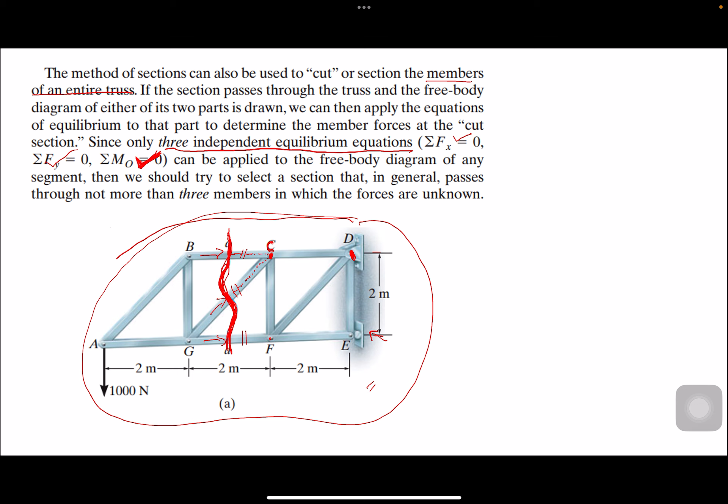Considering the entire truss, you take moments at a certain point, maybe point D or point E. So you decide which to analyze. Just use the entire truss to determine these support reactions. Once determined, you'll know Dy, Dx, and Ex. So there's no problem in using this right side of the truss.

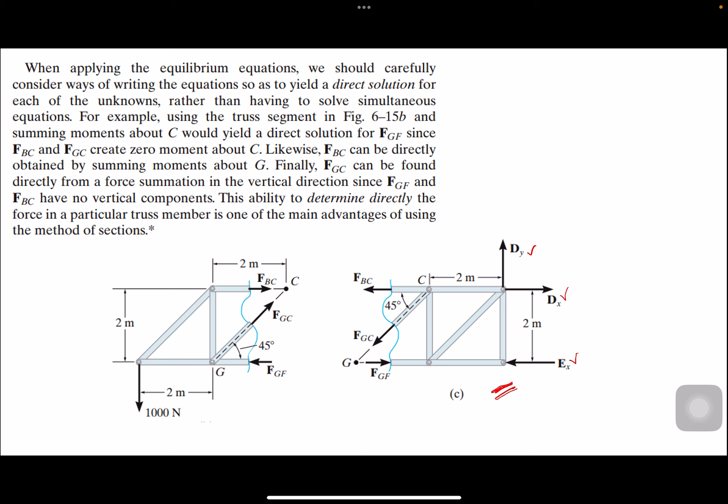As in the method of joints, there are two ways to determine the correct sense of an unknown member force. We will adopt this first method, where through inspection, you can write or draw the correct sense of an unknown member force if you can analyze it. But if you can't, because the case is complicated, you can assume the sense of the unknown member force and then verify it later from the numerical results.

So if the value we calculated is positive, for example in member FGC, it means our assumed sense in the FBD is correct. If what we got is negative, for example in FBC, it means we need to reverse what we assumed in the FBD. So it should actually go toward this pin.

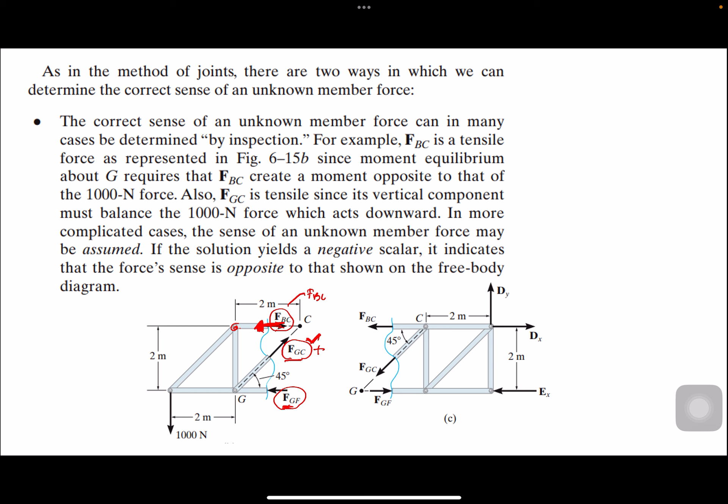So here is the procedure for analysis. Again, if what we're looking for are forces in just one, two, or three specific members of the truss, we can use the method of sections. And the first step is to draw its free body diagram.

We choose where to cut or section the truss through the members where forces are to be determined. Wherever you cut, the forces of those members become exposed. So usually, wherever you cut is where the forces you want to find are.

Then, before isolating the appropriate section, it may first be necessary to determine the truss support reactions. So if necessary, you compute the support reactions by considering the entire truss.

Then draw the FBD of that segment of the sectioned truss which has the least number of forces acting on it.

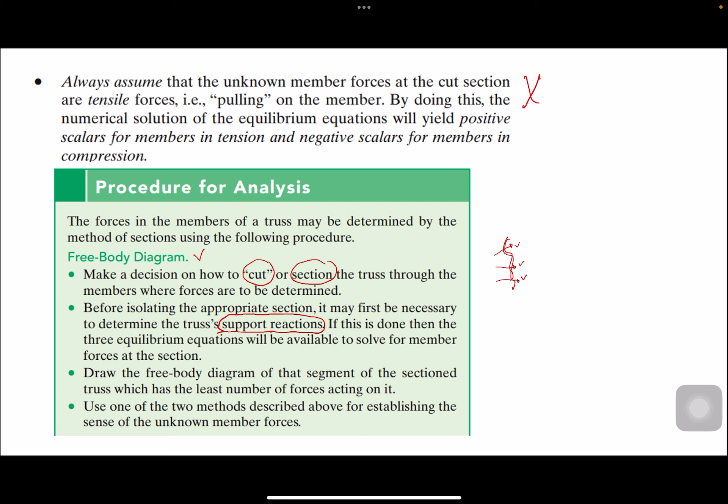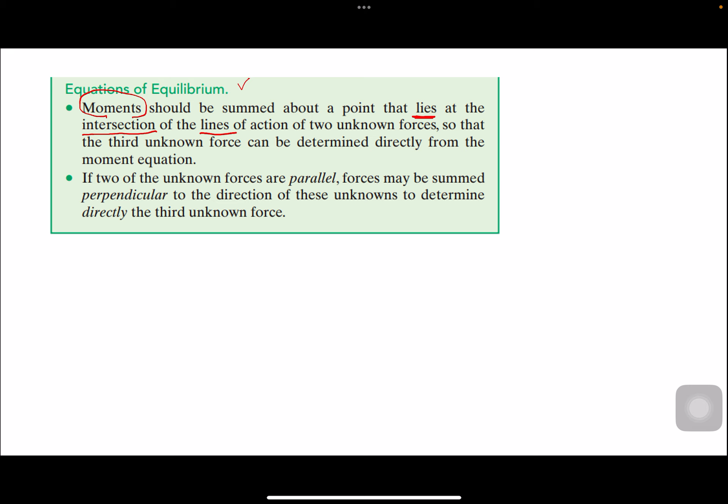Then use one of the two methods described above for establishing the sense of the unknown member forces. Then apply equations of equilibrium, and accordingly, choose the point where you take moments at the intersection of the lines of action of two unknown forces, such that the third unknown force can be determined directly from the moment equation, since the other two pass through the point you chose. So only one force remains in the moment equation, which is the unknown force, and you can get it right away.

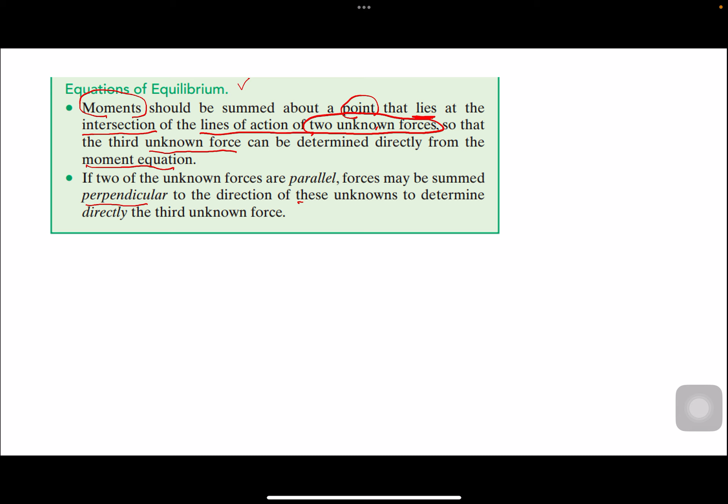If two of the unknown forces are parallel, forces may be summed perpendicular to the direction of these unknown forces to determine directly the third unknown force.

So for example, if these are the unknown forces, one to the right, one to the left, and there's one like this, these two forces are parallel. So if we want to find this force, say force GC, since these are parallel, we sum forces in the direction perpendicular to this parallel force, in this case along Y, so we can directly get the unknown, the third unknown force, which is FGC. Since this has no Y component, and this one also has none, we can get it directly. That's it.

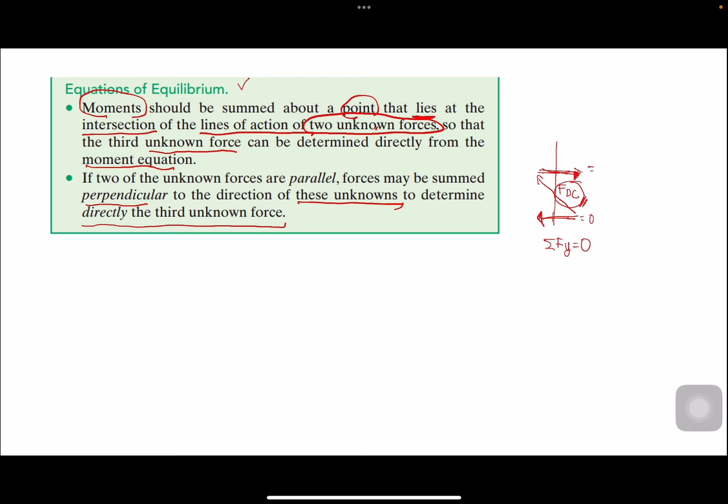So we have an example here. Determine the force in members GE, GC, and BC of the truss shown. Indicate whether the members are in tension or compression.

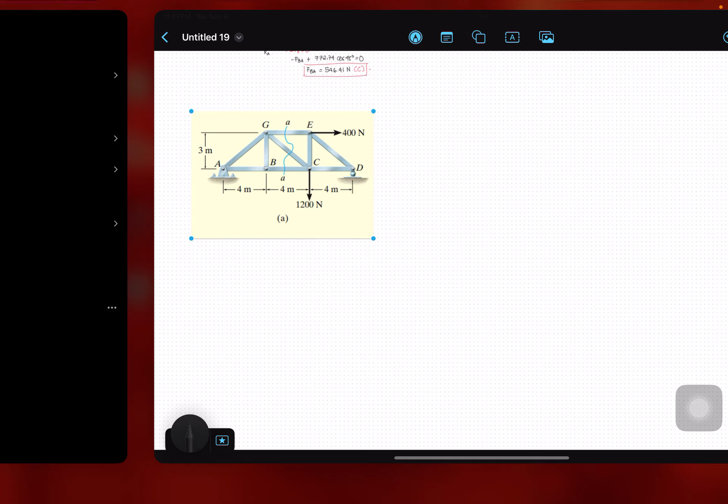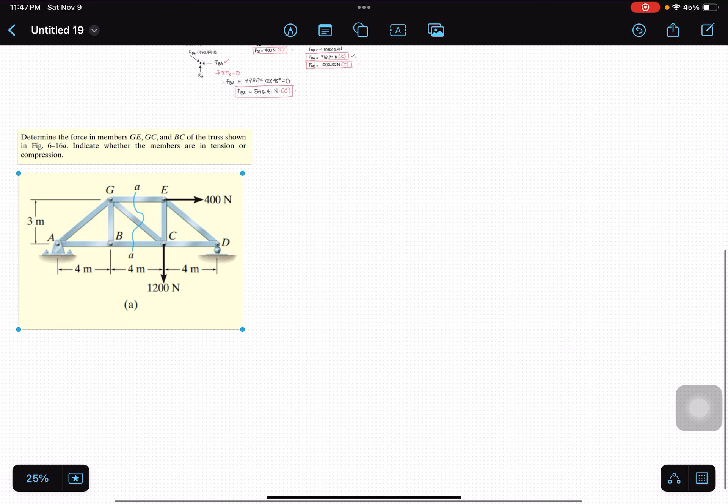Determine the force in members GE, GC, and BC of the truss shown. Indicate whether the members are in tension or compression. So that indication is always required — we need to know the nature of the force in the member, tension or compression. So we can see specifically what forces are being asked: members GE, GC, and BC.

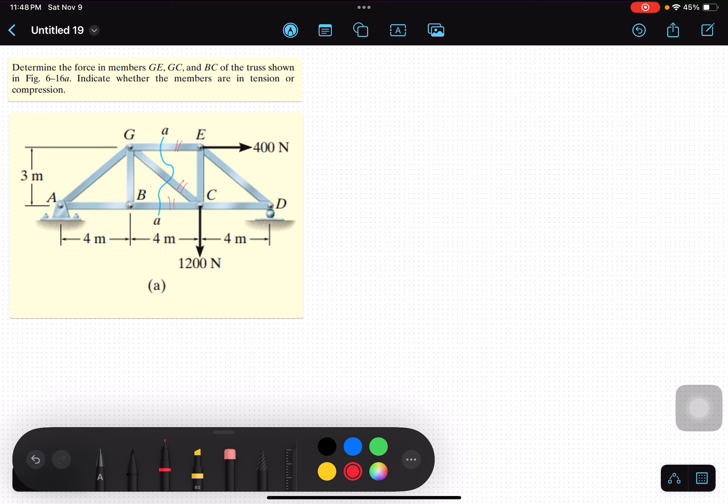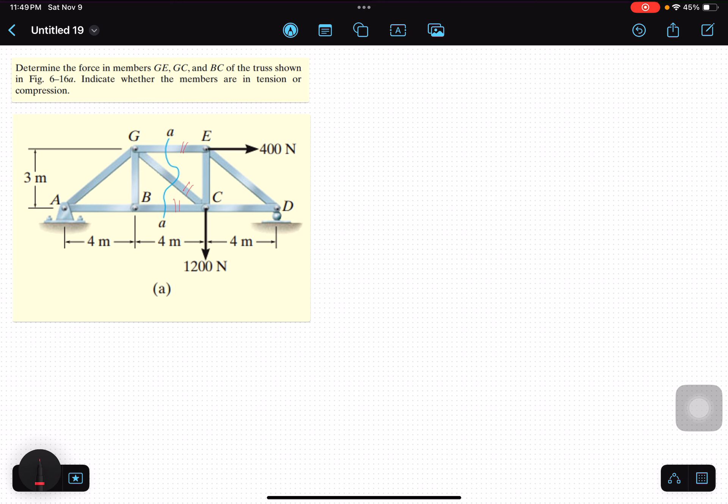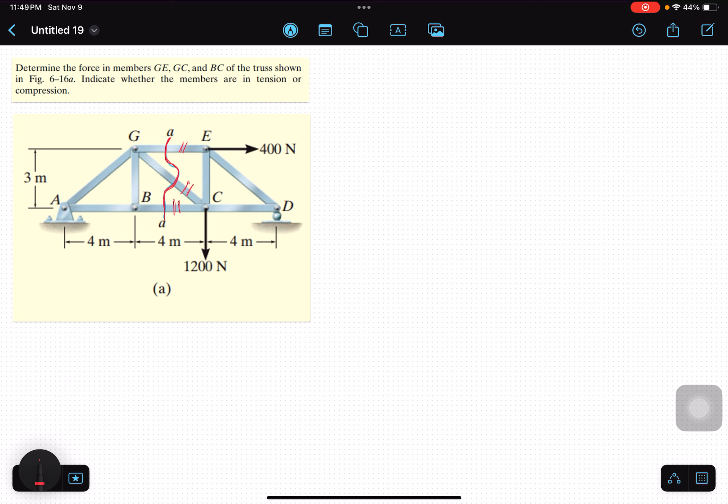So, first step, we need to make a cut. But before we cut, where do we cut? Of course, the section where we cut should expose the forces we want to get. Here, these are FGE, FGC, and FBC — three unknowns, three members. So if we cut at this blue section, what gets exposed are three unknown forces in the three members. That's okay, because as discussed earlier, the unknown forces when you cut should not be more than 3. In this case, it's exactly 3, so it's fine.

Now, before we cut, let's look at the left side and right side — both have support reactions. So maybe it's necessary to compute the support reactions first. Which side do you want to consider? If left, we need the reaction at A. If right, we need the reaction at the roller. Let's say we consider the left side of the section. So therefore we need these support reactions: AY and AX, since it's a pin, and in 2D there are only two, AY and AX.

And for AX, since there's only one force along the horizontal, 400 Newton, that is what's countered by the X component of the support reaction at A. If this is to the right, it means the reaction is to the left, same magnitude, 400 Newton.

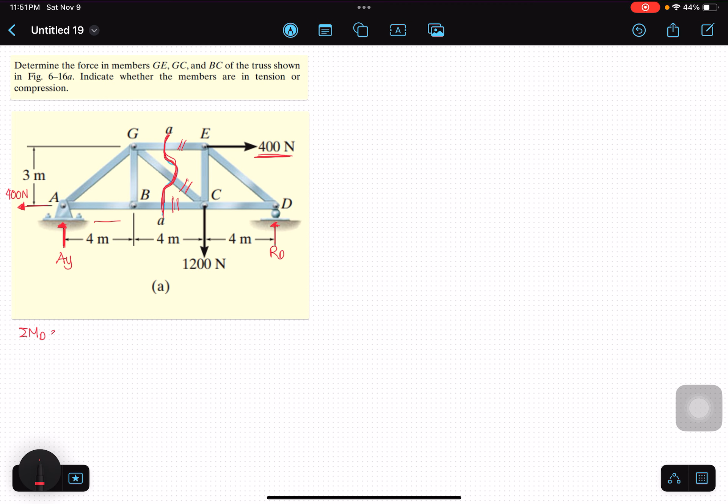So what's left is the reaction in Y, AY. How do we find AY? We do a summation — since there's a roller too, let's sum moments at point D equal to zero.

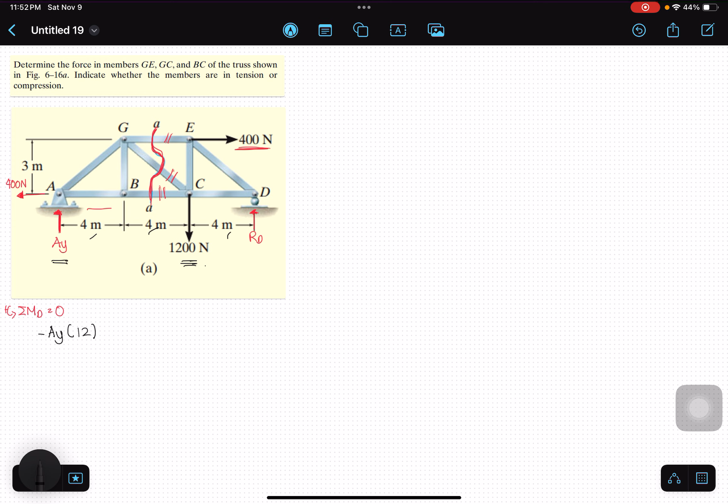Taking counterclockwise as positive: at point D, AY creates a moment. AY's moment is clockwise, so negative AY times moment arm of 4 plus 4 plus 4, giving 12. Then the 1,200 Newton force also creates a moment, counterclockwise, so positive 1,200 times moment arm of 4. Then the 400 Newton force also creates a moment, clockwise, so minus 400 times moment arm of 3 meters. All equals zero.

So the answer here will be AY equals 300 Newton. You can check using your calculator — yes, it's 300 Newton. So we've obtained that.

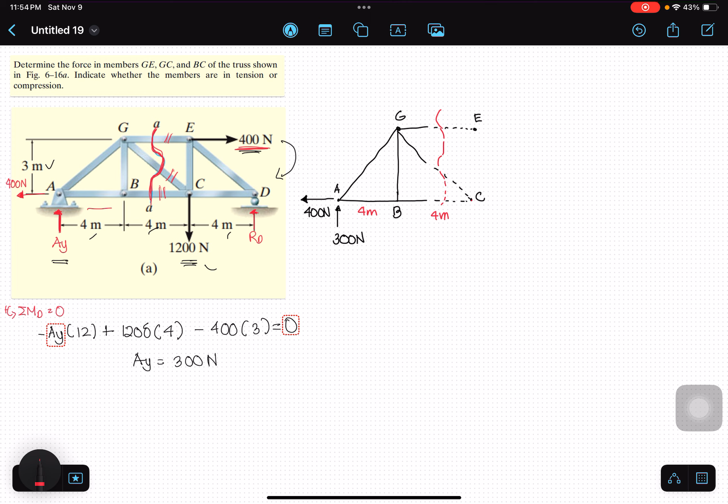So now we can draw the left side of the truss. Here it is. This is point A. Let's write the forces: AY 300 Newton, then 400 Newton. Then this is joint G, joint B, then it's cut there — these are the members. Then supposedly there's point C here, and point E here. The distances: this is 4 meters, 4 meters. Even though it's positioned like this, class, we still consider the geometry of the original truss — where point C and point E actually are. Let me just erase that.

Then let's draw the assumed sense of the unknown forces in the members. This time we won't inspect, we'll just assume. I'll assume FGE is tensile, pointing that way — FGE. Then member FGC is pointing this way, compressive, FGC. And for BC, I'll also assume it's tensile, so you have FBC.

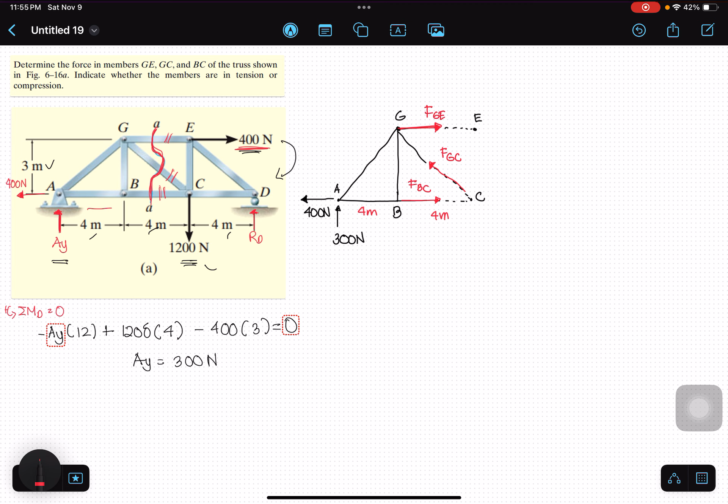Okay, let me pause here for now — I will continue in another video.